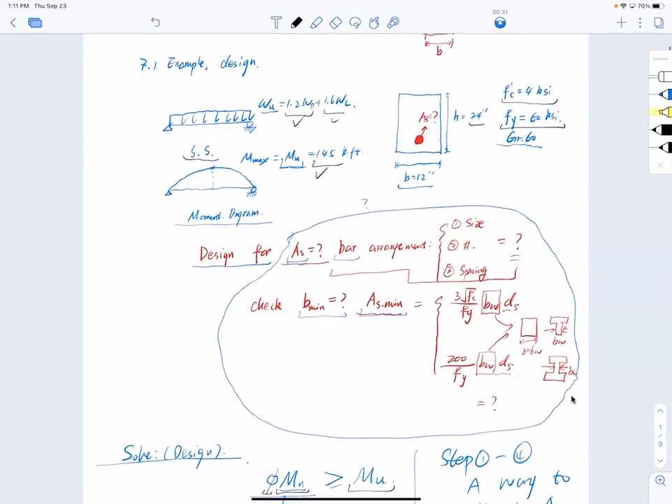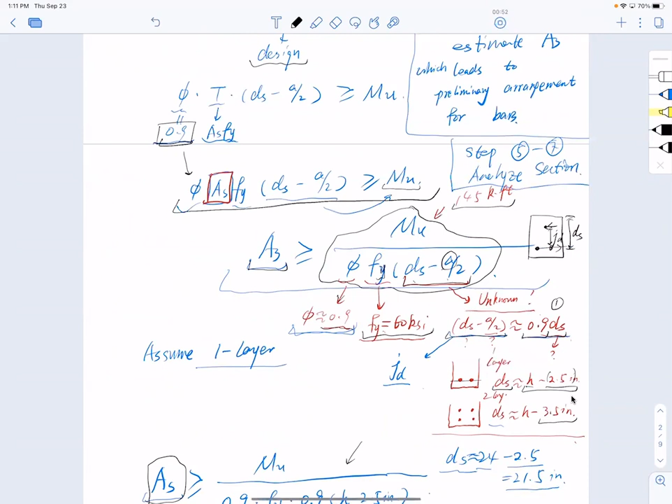So what did we do? We start from the design philosophy, phi Mn has to be greater than Mu. Then we guess and estimate phi, which is 0.9. Then we use As greater than or equal to the number from the design equation. And don't forget, we estimate ds minus half a as approximately 0.9 ds, 90% of the depth.

For one layer reinforcement, ds equals h minus 2.5. For two layers, ds equals h minus 3.5. For any design problem, for example exam number 1, you start from one layer unless I specify in the problem that 2 layers or multi-layer reinforcement might be needed. Usually it's 1 layer.

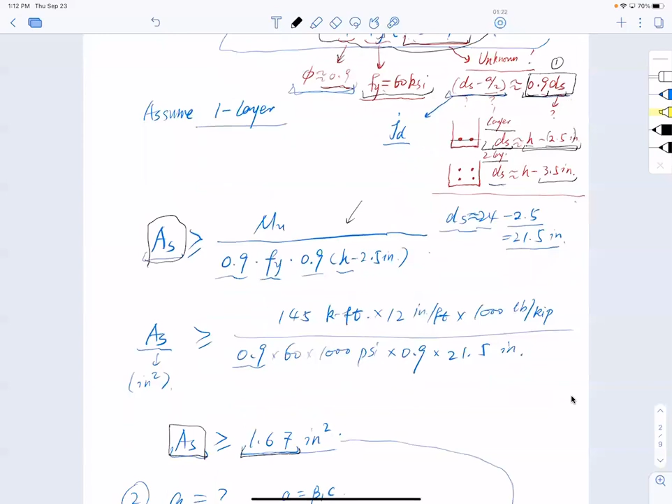Then from there, you calculate your first estimation of As. You get As area equal to 1.67 square inches, and then we proceed to recompute the effective compressive zone A. So how do we calculate effective compressive zone A? We use the same equation: compression has to equal tension.

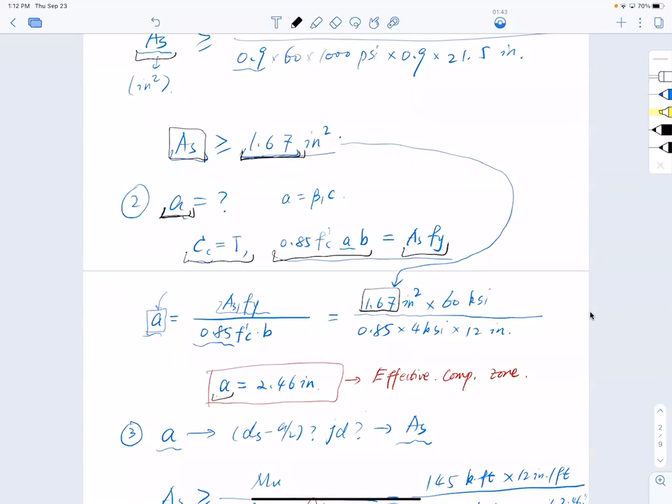0.85 f'c A b equals As fy. Then I get the effective compressive zone A right here. Once you have the effective compressive zone A, you use that A to recompute your lever arm, that is jd, or ds minus half a.

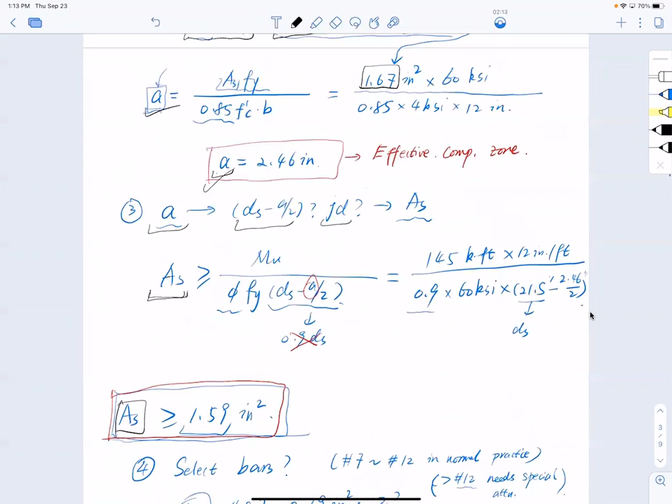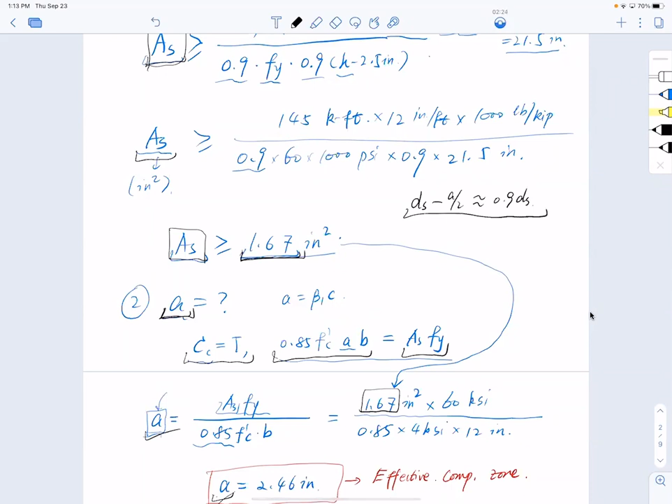So pay attention folks, we're doing As twice, essentially. We did As without knowing anything, we made a guess, most importantly here: ds minus half a approximately equal to 0.9 ds, this is approximate. We bring this value in, calculate the new A, and recalculate the As.

That's what we did, and once we have As from the second calculation, we can start selecting bars. So how do we select the bars? We pick one row for now, say number 8 bar, and do 2 number 8 bars—that's not enough. Then we go to a bigger bar, number 9.

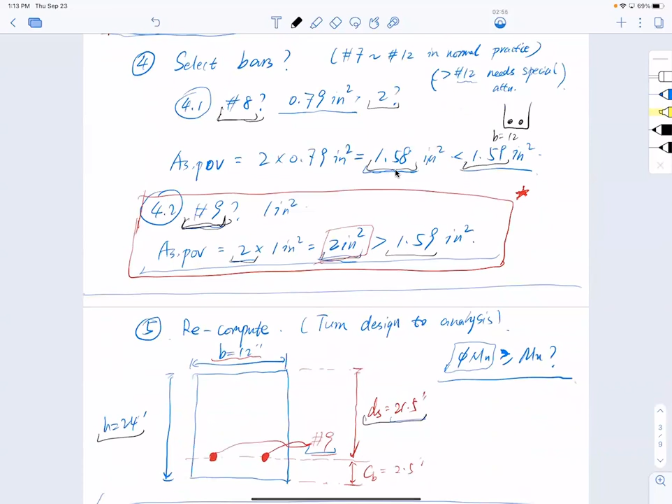We say okay, 2 number 9 is probably going to be enough—we overkill, 2 is bigger than 1.59. Then we bring this 2 number 9 bars in and recompute the section capacity, turning this design problem into an analysis problem.

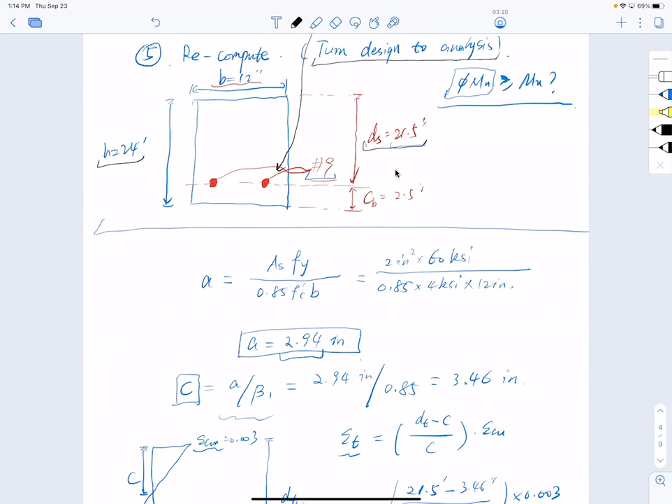Okay, so this is very important. All the steps 1 to 4 basically give us an estimation of reinforcement. Given the estimation, select the bars, then we turn the design into an analysis problem and recompute A again, doing the whole shebang like we did before.

And then the final thing to watch out for is the strain in the steel. You have to make sure that the strain is bigger than 0.005, which is tension controlled. Why is that so important? Because we made the assumption at the very beginning that phi equals 0.9.

I had a question from a student yesterday saying, what if at this point I realize my epsilon t is not tension controlled? It might be something else. My answer is, if epsilon t is not tension controlled, that is fine. Just use that strain value, recompute your phi, and recompute your moment. The only thing you need to worry about is that if epsilon t is greater than 0.005, tension control is fine. But if epsilon t is between 0.005 and 0.00207, all you have to do is change phi, okay?

You do not have to worry about Mn calculation, because Mn equals As Fy times d minus half a, and if your steel strain is between these two values, you still have the yield strength in the bar. The problem only arrives when your epsilon t is smaller than 0.00207.

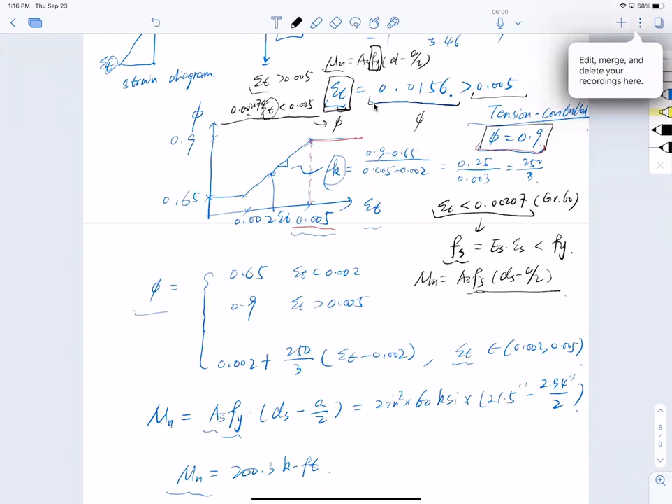Okay, can you guys hear me? Can you guys hear me? Yeah, I can hear you, did I cut out? Was I cut out? Okay, sorry, where did I cut out? Let me repeat, let me get this thing closed. Okay, I don't know what's going on with this app thing. Okay, you guys hear me okay? Yep, all right, good deal. Just froze a little bit, right? Go back about 2 minutes. Okay, I think I was talking about epsilon t, was I?

When epsilon t is greater than 0.005, it's got to be tension controlled. Was it? Help me out here, Jordan. Was I... yeah, that's there where it started getting fuzzy. Okay, sounds good, yeah, Sophie. Okay, Jordan, all right, let me do that. So let me clear it up and re-say this. This is important, okay? I don't want you guys to mess up on exam number 1. Let me clear this up.

No worries, we have time today. Okay, so get this whole thing to come out. Good, all right, so let's take a look at it, right?

Once I have my epsilon t calculated out to be larger than 0.005, I'm okay. Why is that? Because it's tension controlled and phi equals 0.9, which works out perfectly because I assumed 0.9 to begin with. The problem only arrives when epsilon t is now smaller than 0.005.

Then I have two scenarios. Scenario 1, epsilon t is between 0.00207 and 0.005. This means you can still use Fs equal to Fy, meaning you can still use the old moment equation, Fy times ds minus half a. You still can do that, because the reinforcement yielded at least.

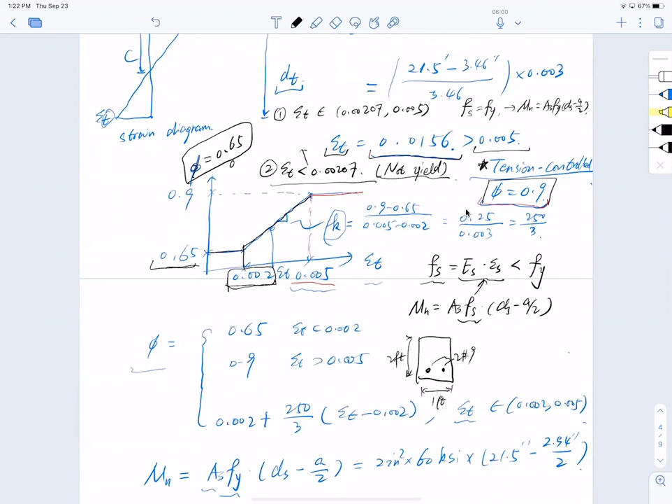Quiet, silent. So in terms of the graph, when you look at it, when you have 0.9, you're under tension control, right? When you have 0.65, you're under compression control, and in the middle, it's transition zone. That's correct, right? What does that mean?

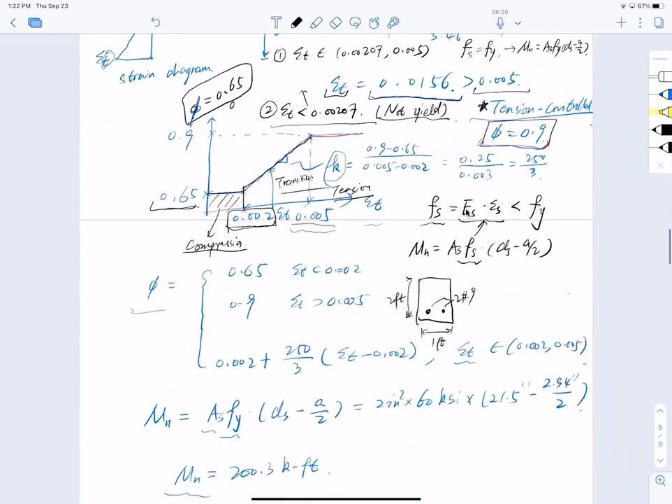Real life example. So the physical meaning of these three words really comes from the failure state. Let me rewrite it here before I move forward. Let me find the best spot here. Maybe this is the best. Again guys, I write it here, doesn't mean it's really connected. This is more like an independent excerpt here. So if you really think of it, when I say tension controlled, that means at failure, my strain in the steel is always big and approaching a failure strain. And then concrete fails there. This is tension control, meaning that the tension of the reinforcement governs the failure mode.

Now, the word compression control means that at failure, my concrete has busted at 0.003, but my steel does not, or has not even yielded yet. So it is a concrete compressive failure that governs the failure of the beam.

Nick, I have to mute you, okay? In case you have any question, you can raise up. And then if it's in between, we call it transition, because both the compression of the concrete and tension of the steel determine the failure state. Is that clear? Yes, thank you. Sure, no problem.

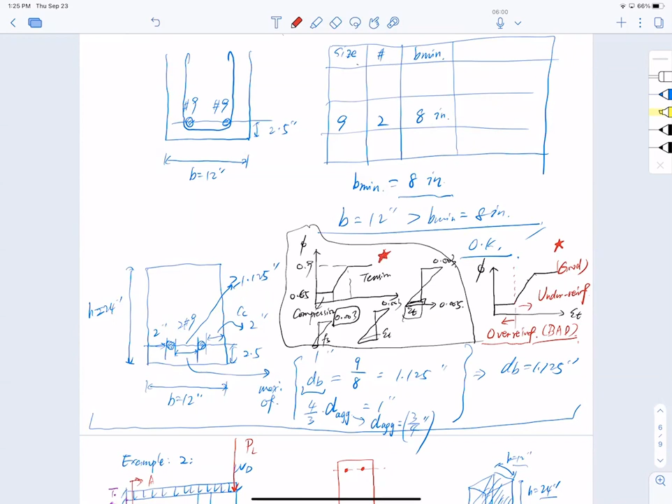So naturally, under reinforced state covers tension control and transition zone. This is just knowledge for you, and you need to know it when people talk about it. But this is something we're most likely not going to test you on. We'll test you mainly on tension control, transition zone, or compression control.

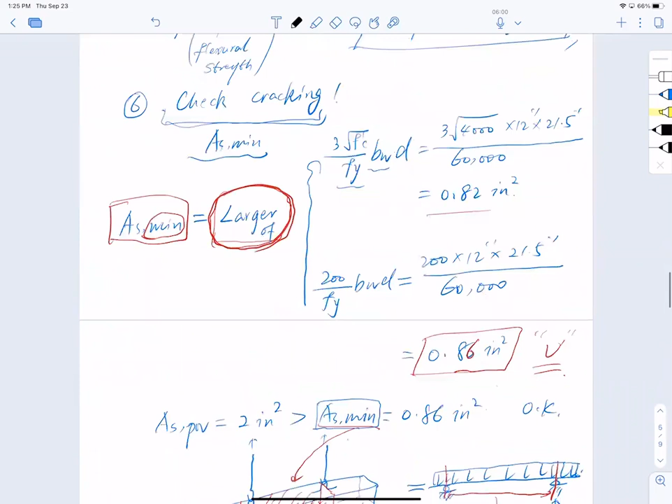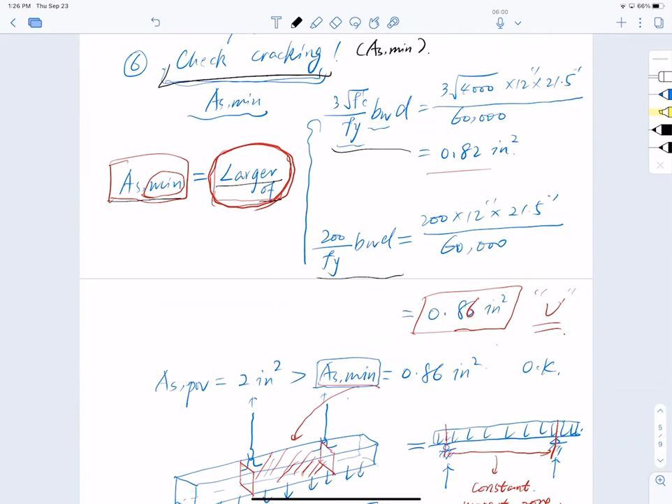I have to run faster a little bit to finish this example. So we finished example number 1, and don't forget at the end of it, we check two things. One is that we check cracking, which you can think of simply as the amount of minimum reinforcement needed for the beam to resist cracking, so when you lift the beam up, it won't fall on you. This equation here is AS min equal to the larger of these two equations, not the smaller of, and you find the larger value and this governs.

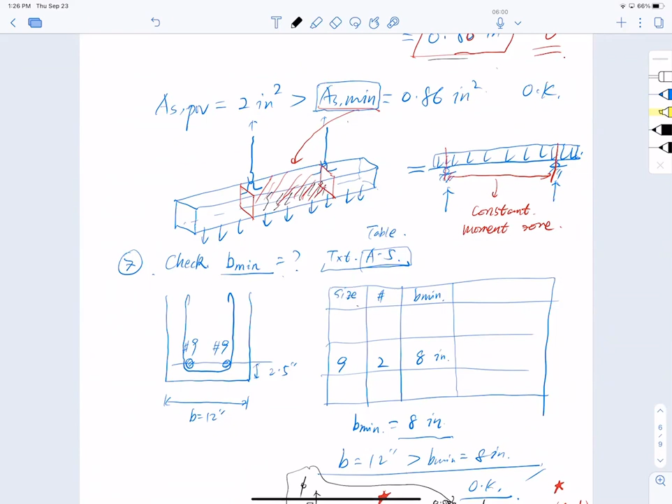And I even showed you how the crack's going to happen. It's probably going to happen between the lifting points, so that's where you need to be careful about. Then the last but not least is to check detailing. In our case, we're mainly concerned about the minimum beam width. And how do we do that?

Two ways. One is go with table A5, that is on Canvas in your file folder. You have sizes, you have numbers, you can estimate the minimum beam width. But I strongly urge you to use the calculation we showed from the previous lecture, where you actually calculate the beam minimum. You will need that for your first exam, which I will show some problem examples tonight.

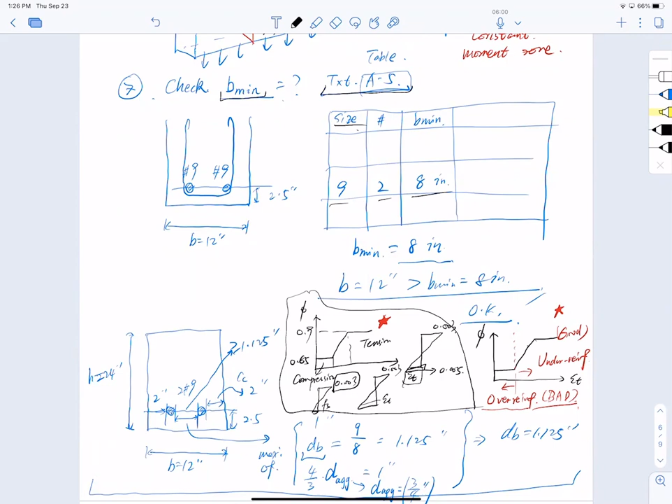Okay, so that is done, not too bad, and we got everything situated. We're happy, and we'll move on to another example of a cantilever beam. First thing first, when you have a cantilever beam, the reinforcement has to sit differently.

Now, my first victim, Audrey, Mr. Powell. Audrey, you there? Hey, how are you doing? I'm okay. Good, good. Quick question.

Don't be nervous, okay? So if I have a cantilever beam, does my reinforcement have to be on top or on the bottom? If I have a cantilever beam, right, it's bending this way, so which side is my tension side? It's at the bottom. The bottom will be in compression, unfortunately, right? So which side will be my tension side? The top, right? Because I have tension, I have compression, and finish the coupling moment.

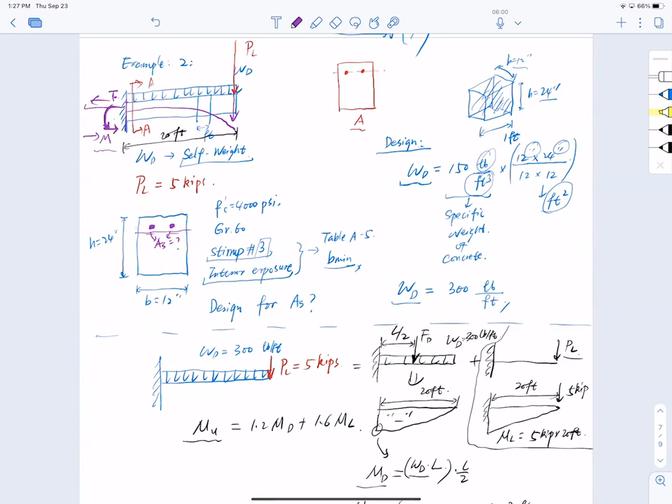So if my tension side is on the top, will my bars be on top or bottom? The top, right? So that's right. Don't forget, in the exam, thank you, Audrey, we'll ask you where the bar is going to be at. So in the exam, I can tell you right now, I just made a problem this morning.

So in the exam, I ask you to draw the geometry of the beams. For case A, you have a cantilever beam, and this is where the reinforcement is at, so you draw it on the top. And case B, for example, I'm just making things up again, and I have a bending moment right here, sorry, this has got to be positive. Positive bending moment like that, and I ask you where the reinforcement is at, you draw it on the bottom. So it really depends on the positive or negative sign of the bending moment, which determines where the reinforcement is at.

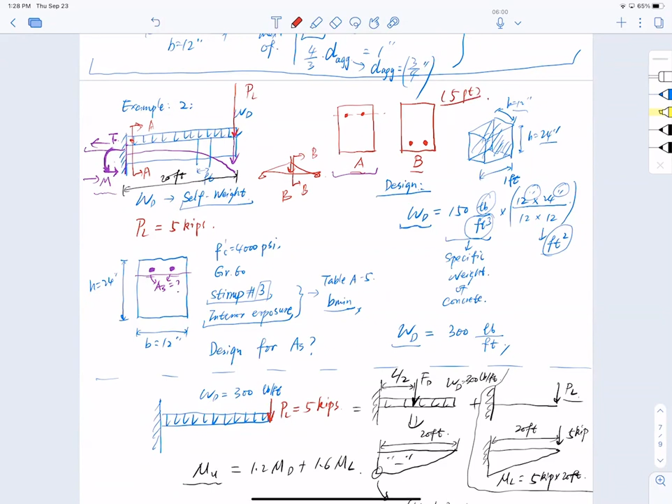Okay, so this is probably worth 5 points, guys, in the first exam. Pay attention, pay attention. Okay, so that's that, then we're quickly moving on.

We have dead load, we have live load, we demonstrate how we calculate that, and eventually we arrive at a required moment of 232 kip-foot. I believe somebody asked us another way of calculating this. We demonstrate that as well and come up with the same number. We're happy, we're happy. All right, so with that, now let's start about the design process.

So we know the total exerted moment has to be 232 kip-foot. So to come up with a design that satisfies that requirement, phi Mn has to be greater than or equal to Mu, that is 232 kip-foot. Okay, so I don't know anything, but I want to use my first equation, step number 1.

Step number 1 is to find AS, estimate AS. How to estimate AS? AS should be greater than or equal to Mu divided by phi Mn, right? But spell out Mn, that is phi fy multiplied by ds minus half a, ds minus half a.

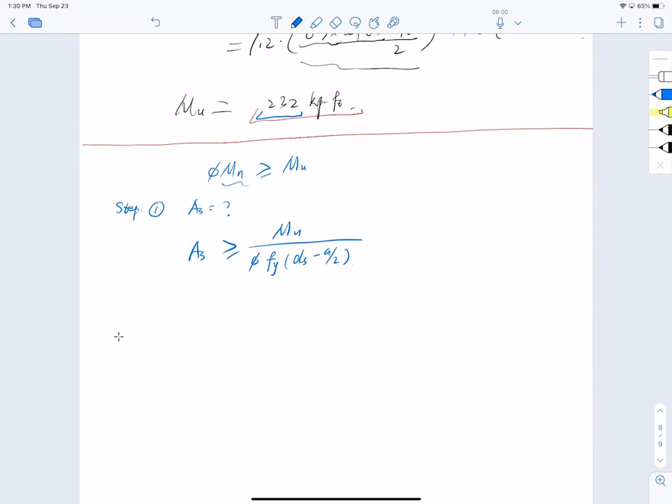Andrew, Mr. Slinkard, are you there? Andrew, are you there? Yeah. All righty. How are you doing, sir? I'm doing okay. Oh, that's good, good to hear.

So quick question here, Andrew. So if I have a ds minus half a, I don't know that. What should I put here?

If I don't know ds minus half a, what should I put here? You estimate it with 0.9 times ds. Exactly, thank you Andrew. So that is what we're going to put here, 0.9 ds, right?

So with that number, I can carry out my calculation. AS has to be greater than or equal to mu, which is 232 kip-feet, multiplied by 12 inch per foot, to convert everything back to inches. Why? Because I want AS to be inch squared. Divided by phi, approximately 0.9, multiplied by yield strength of 60 KSI. I keep the KSI unit because of the kips on top. Then multiply 0.9, which is this 0.9 here, times ds.

What is my ds? I don't know ds, isn't it? But in my head, I now have a picture that my reinforcement is going to be on top. I don't know anything, but I know the section height is 24 inches. So I'm just going to take a bold guess that concrete cover got to be 2.5 inch, since I have only one layer to be estimated. So my depth got to be h minus 2.5, and that is 21.5 inches.

So from that calculation, I can move on to get my AS. Now AS equals 2.66 inch squared. Guys, do you get the same number? Ben, Mr. Schaefer, are you there? Yep, I got that as well. You got that too? Okay, great. Thank you so much. Now we have finally arrived at a reinforcement area of 2.66 inch.

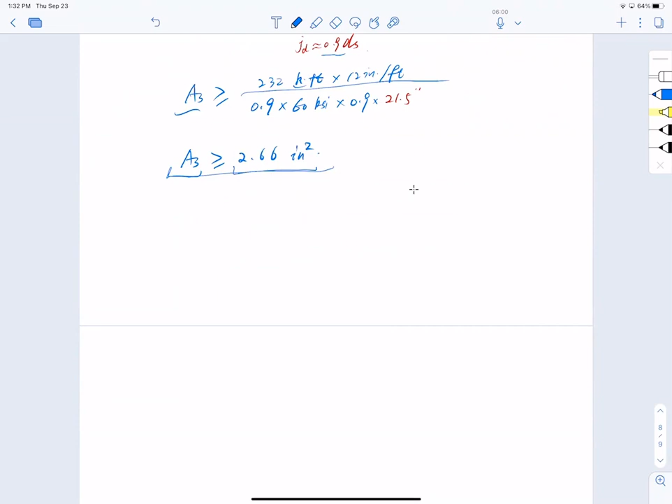Now what we're going to do is follow the next step. The next step is to re-estimate our a, and then re-estimate our AS. Not yet here. After we get our AS, we need to confirm my strain in the rebar to make sure it's yielded, then get my phi, then select the bars. After that, select the bars and get my epsilon t, get my phi, then get my mn, then confirm that phi mn is greater than or equal to mu.

Now this part, folks, I'm going to leave it to you, because you already have an example from the previous problem. This is going to be your quiz number 6: find, actually design for, select bars, check phi mn. And I forgot also, you need to make sure AS min is satisfied, and also the beam width, minimum width, has to be satisfied. This, folks, is going to be your quiz number 6.

Alright, this is what we talked about, designing a reinforcement for known section dimensions. Any questions so far? Any questions? Guys, anything? Are we okay? Any wondering, any challenging questions? Anything? Dr. Mo, okay alrighty. Well, I assume we're fine for now, and I know you have questions later, but we can talk about that.

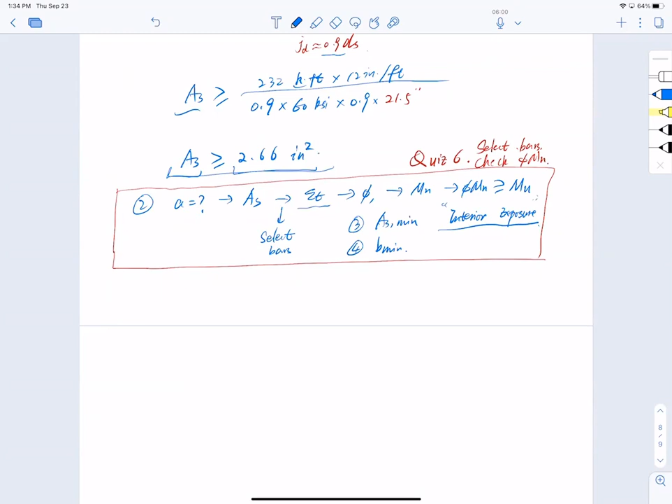Now we have gone through like 1.5 examples of how to design a singly reinforced beam. But you keep forgetting where you're doing this. Sometimes we need a flow chart to help us understand how we do this. So let me introduce a flow chart, flow of design for singly reinforced section with known section size or section dimensions, right?

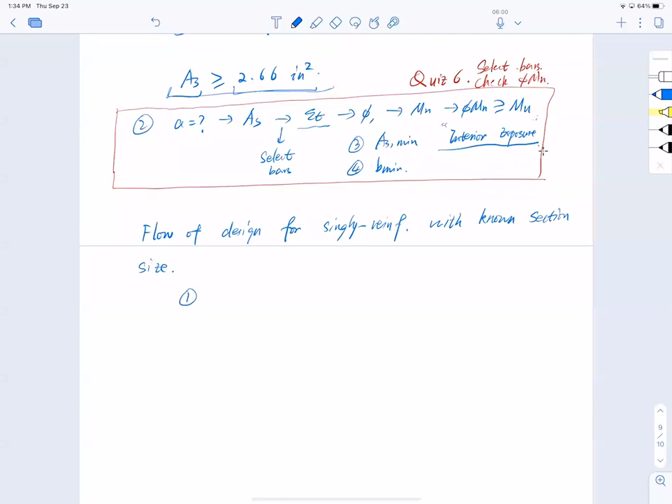So what is the step? First step is to assume yielding, actually assume yielded. Why is this so important? Because I can use T equal to AS times fy, and that's how I got the equation to estimate the reinforcement to begin with. Now with that, I can get my AS.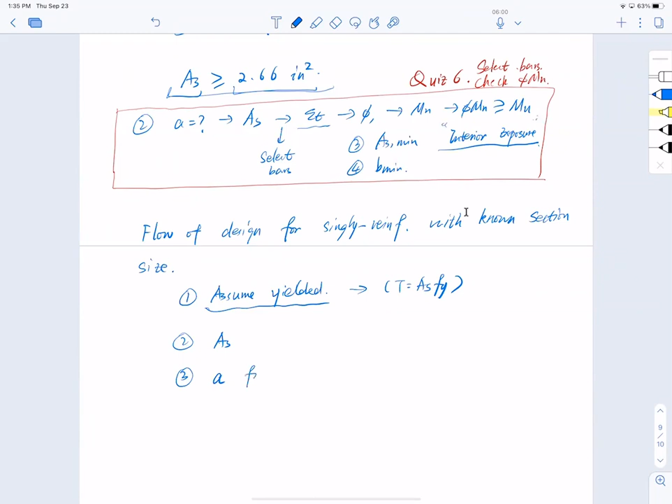Estimate my AS. And once I estimate AS, what do I do? I can get my tension equal to compression, right? So I can get my a from tension equal to compression. I put CC here because all the compression comes from the concrete anyway.

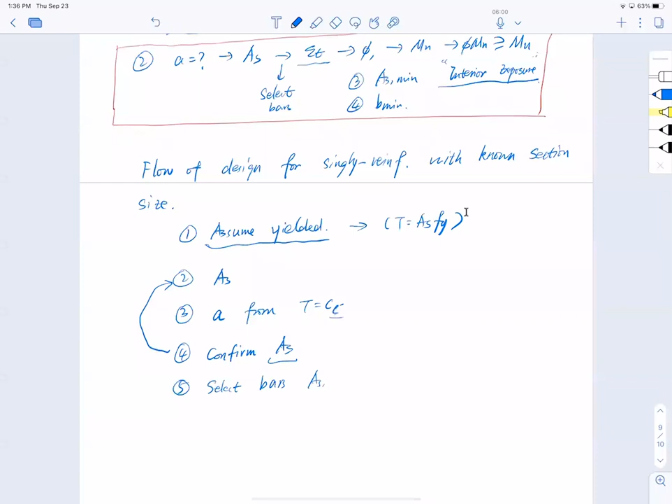Then after I get my a, what do I do? Confirm AS, basically repeat step 2 again to find your AS. Then afterwards select bars that have AS provided greater than or equal to the AS computed. Select bars given that is satisfied. Then with the selected bars, you turn design into analysis.

What's more important in this design analysis is to find the actual compression zone C, and that is equal to the effective compression zone a divided by beta 1.

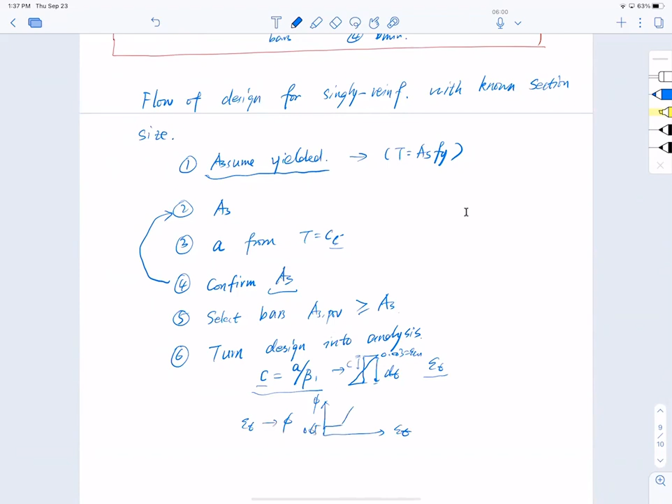Why do we need C? Because we can use our triangle, 0.003 equal to epsilon Cu here, and dt here, to find the strain in the last layer of bars, which in this case is one layer, epsilon t. Then from epsilon t you get phi using that famous diagram I keep repeating: 0.65, straight line, 0.9, 0.005, and 0.002.

So now I got phi, and then last but not least, you get phi mn, make sure that is greater than or equal to mu, but don't forget to check your cracking, which means check As min and check the minimum beam width.

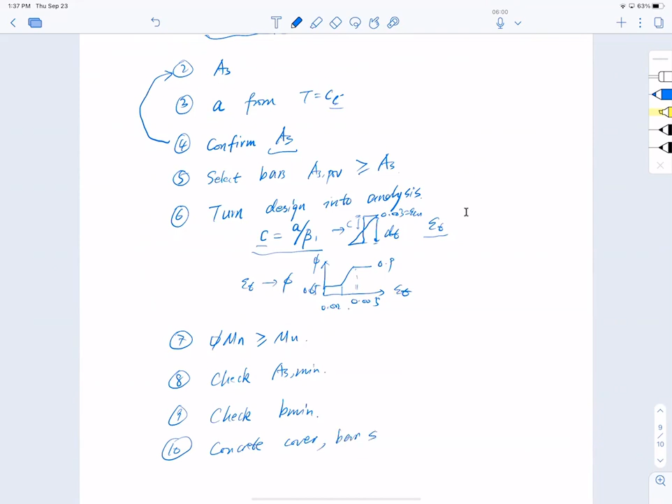And then check concrete cover and bar spacing. You need to fix those numbers, right? And then you're done. That is the flow process of designing a beam.

Now this is designing a beam with known dimension. This is probably something you can use for a cheat sheet, and all those equations we just wrote down, you can jam them here, here, and here as well, all those equations. You can use that for your cheat sheet.

Alrighty, any questions folks? Are we okay here for design of a singly reinforced beam with known section size? Are we okay? All right, silent again. Well, let's see—you might have more problems when I give you the practice problem.

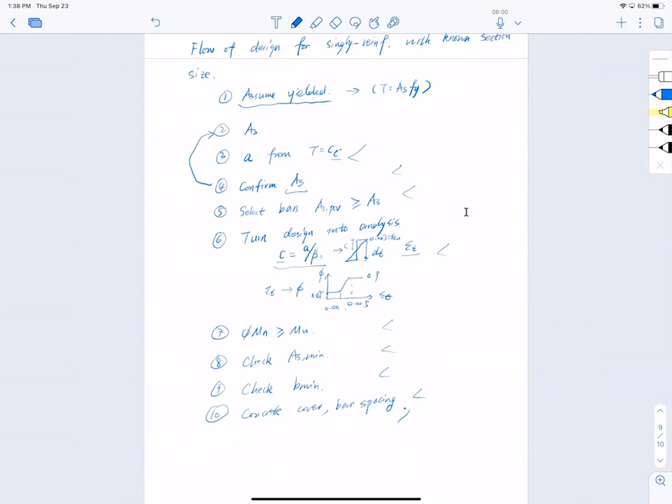So here, let me open up a new lecture today. Today, the main dish is to talk about lecture number 8, design with unknown section size.

Today we'll talk about term A: design for singly reinforced section. We're still in the singly domain, singly reinforced section without section size. Very important—without the section size. And this, ladies and gentlemen, is actually a very challenging problem.

Now before we do anything, let's see what we need to learn today, right? Two objectives. Objective 1: we need to understand there are so many new terminologies today we're going to introduce. The first thing is to understand the definition of reinforcement ratio.

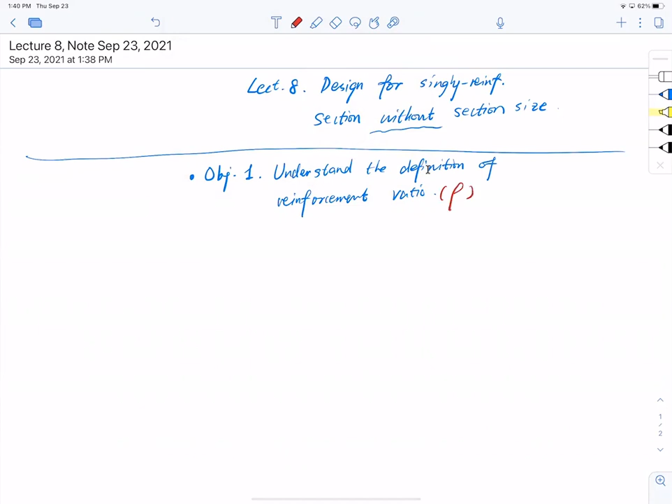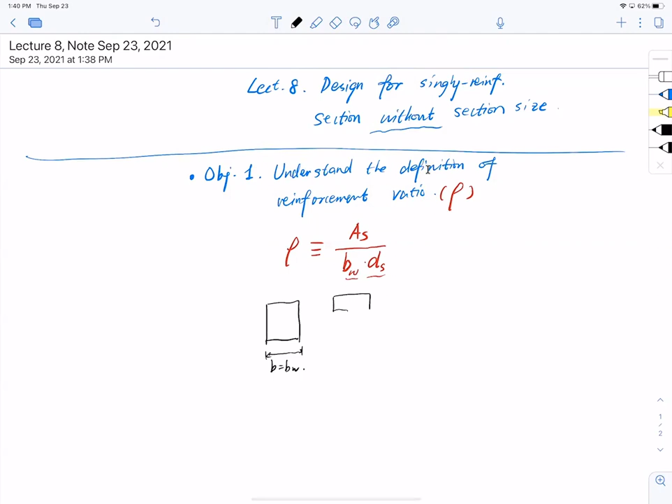What is BW? What is DS? If you have a section like this, this is B, and at the same time it is BW. If I have a section like this, say a T-beam, I have BF meaning the flange width, and I have web width BW—in this case, this is BW. For an I-beam, same thing, this is BW. Now DS means the depth of the section, the center of the group of the bars—group of the bar, not DT, but DS.

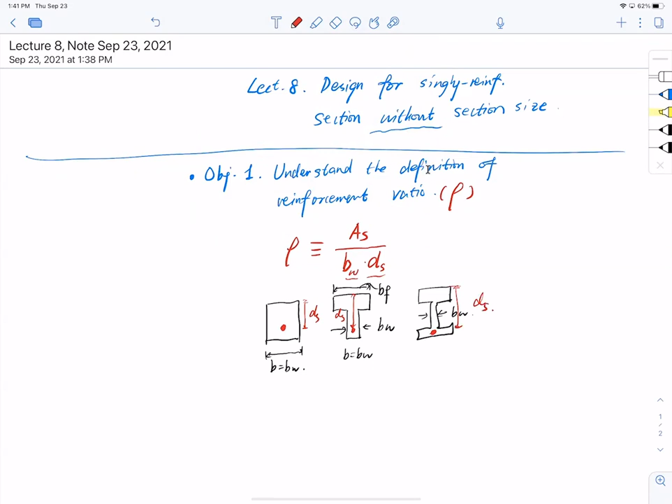So that is the definition of reinforcement ratio. Now that's the first thing we need to understand. Objective 1 completed. Objective 2: we need to learn to design—design singly reinforced section without section sizes.

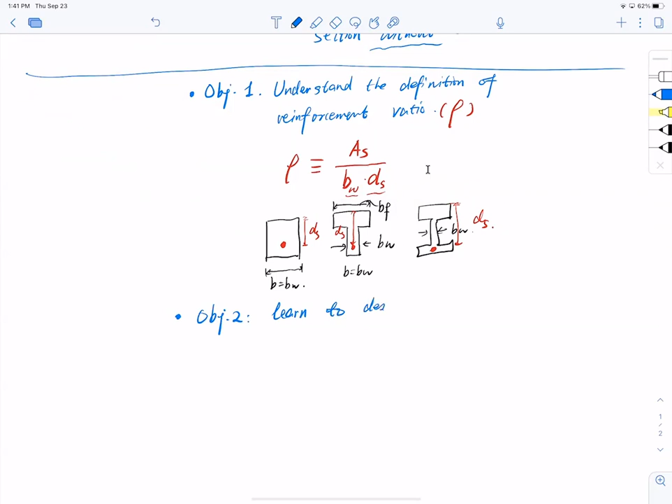So you know it, right? So how are we going to design? Now going back to old topic, you remember we've gone through under reinforced, over reinforced, tension control, compression control, transition zone, right? So I'm going to pick my next victim here.

Who's on my list? Brennan, Mr. Poole, you had the microphone issue last time. Are you there? Still having a mic problem? Brennan, not responding? Or am I disconnected? Folks, can you guys hear me? He said he doesn't in the chat. Okay, let me see that. Still yes, all right, I'll still have to skip you. You're losing a lot of extra credit opportunities, Brendan, I'm just saying. Carson, are you there?

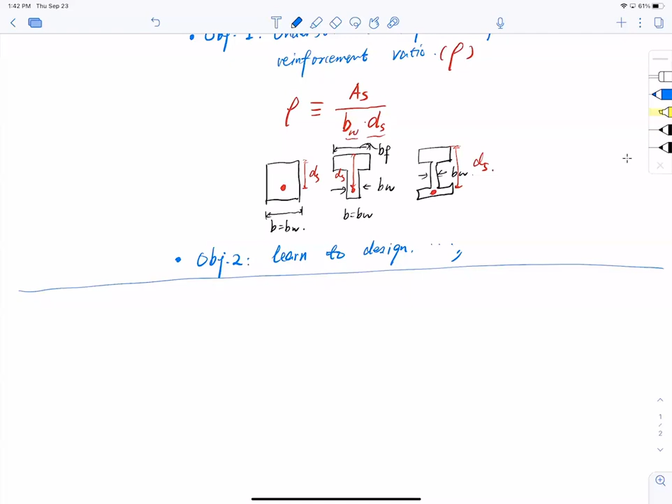Yeah, I'm here. Okay, quick question for you, Carson. How are you doing, by the way? Good. How are you? Good, good.

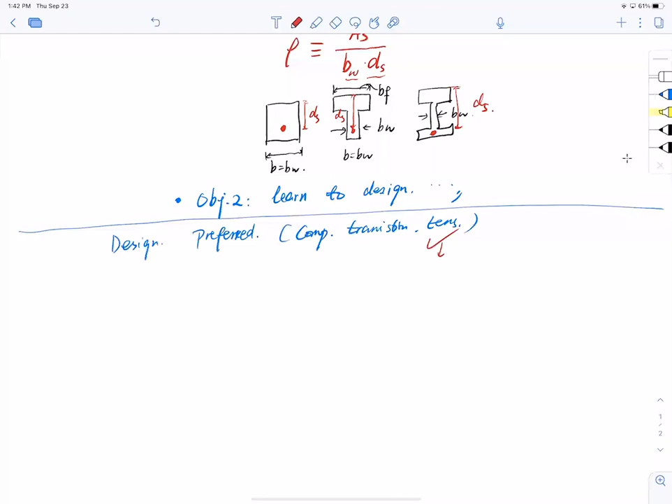So when I design my beam and want to give you options for a preferred state, I have compression controlled, transition, and tension controlled. Tension controlled, right? Why is that though? Why do I want tension controlled? Because more of the failure in the beam will be on the reinforcement, and that gives you more ductility too.

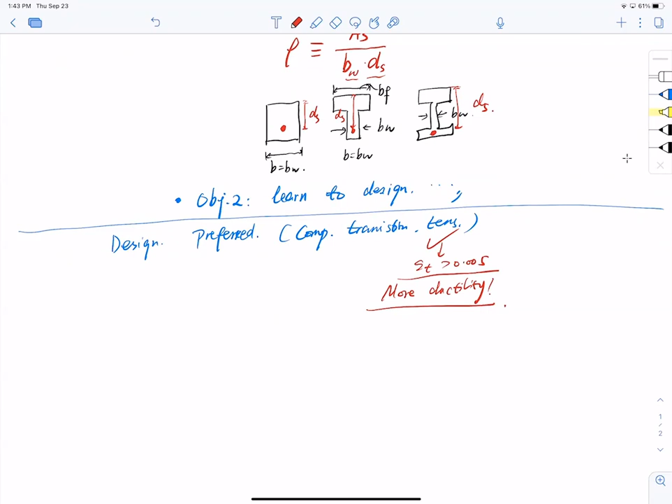Thank you so much. So that is the reason we want more ductility. You were seeing that in the lecture before, I said you compensate that by the strength reduction factor. The lower ductility you have, the lower strength reduction factor you have. So to compensate that, but that does not mean we want low ductility. It's just some compromise we have to make. So now we all know that we want a ductile beam, high ductility. So how do we make sure we have that?

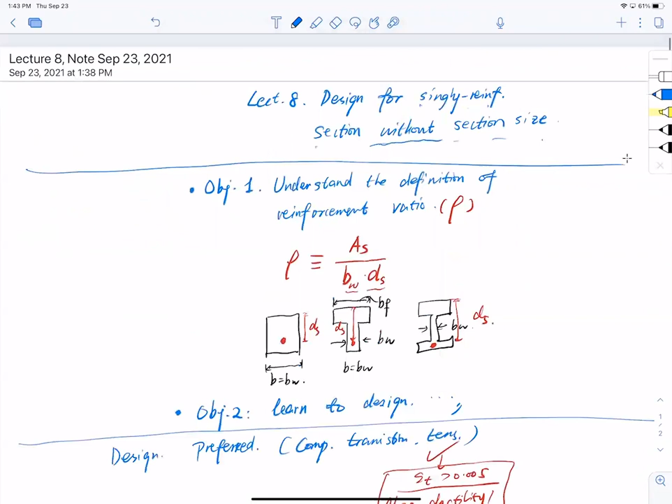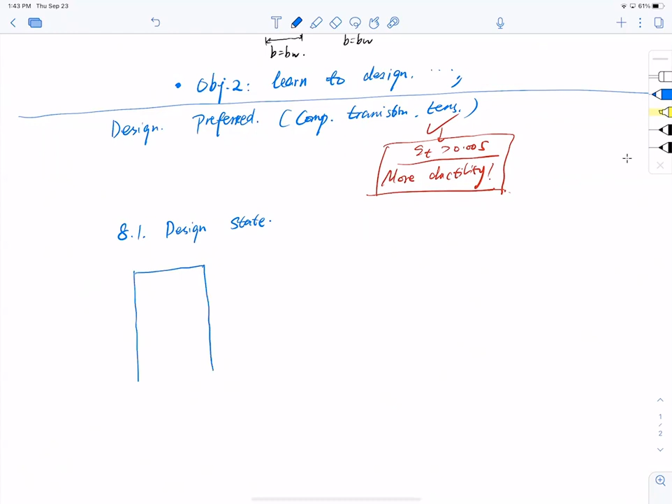Is it 8? Yes, so 8.1. Let's talk about design state. So a section looks like this - you've seen this so many times before. Have a width, have a height, and also have a depth. And I'm going to put 2 symbolic bars representing the reinforcement, and then put some strain diagram showing what the strain diagram looks like.

And this is what it is, a triangle. The failure strain for concrete is 0.003, and the actual compressive zone size is C, and the reinforcement here, and the strain in the reinforcement for one layer, I can call them the same, epsilon S equal to epsilon T, isn't it? So this is a strain diagram, and you know that to get 20% of free credits, you need to draw the corresponding stress diagram as well.

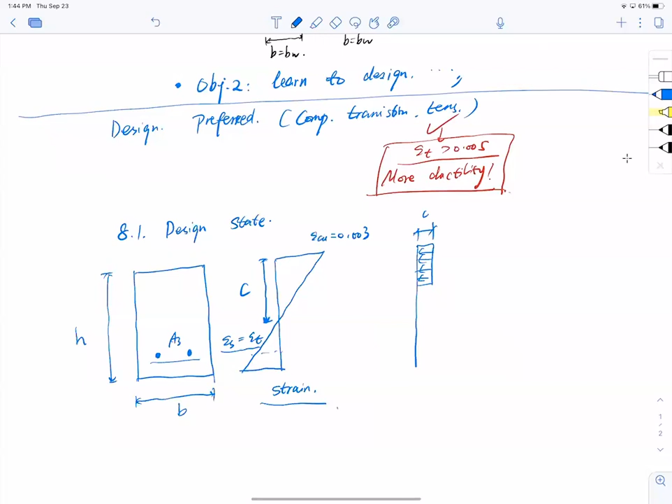So the stress diagram reads like this, and this top here is 0.85 f prime c, and the effective compressive zone is beta 1 C. Then the stress in the rebar is going to be Fy tension, like so, and internal forces: Cc concrete equal to 0.85 F prime C A B, and has a distance of half A away from the top fiber. Then last but not least, the tension here, T equal to As Fy. Mind you that the distance between the compression and tension has to equal ds minus half A.

So this is a 5-pointer. Well, I have another 5-pointer, and I have another 5-pointer, and this is called internal forces. When you collect them 3, I give you another extra 5-pointer to make it 20%, right? So that's not too bad.

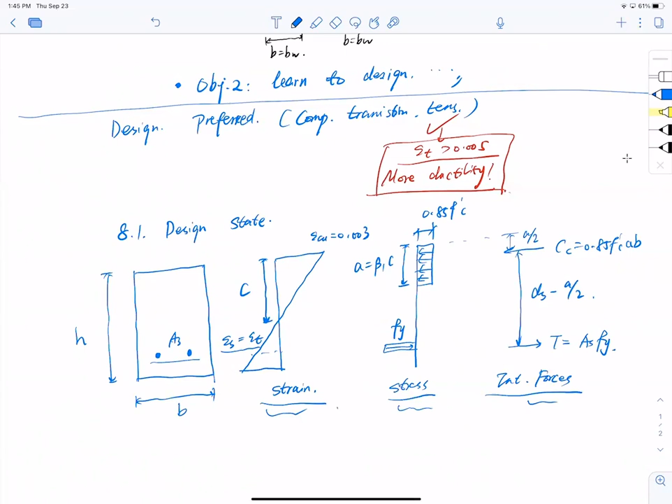Now, when I have a design state, if I want to start the beam with a tension control limit, I can enforce my strain in the steel to be a higher number, and that number has to be something greater than 0.005 to be tension controlled. If I can make sure my tensile reinforcement hits this number, then I surely have a tension control state in my beam, isn't it? So I call this a choice, or we call it design state.

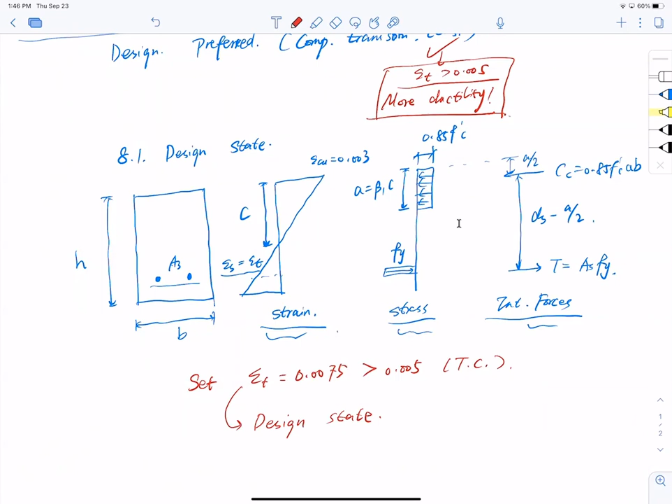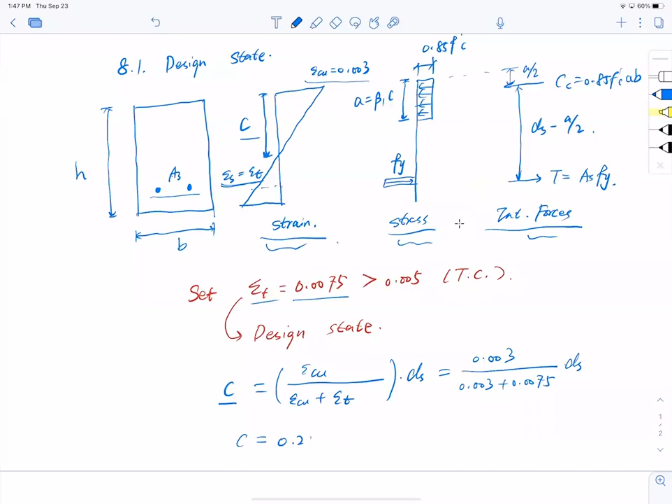Now this magic number ACI picked out for us already. ACI says you better use 0.0075 - I missed the 0 here, folks - 0.0075, which is a larger number than 0.005, to make sure that is tension controlled. So much to ensure that if I use this number, I can actually calculate my actual compressive zone size C, using the triangle here, that equals epsilon Cu divided by epsilon Cu plus epsilon T, which is the strain here. I set it to be 0.0075 multiplied by ds. Bring the numbers in: this is 0.003 on the top, bottom here 0.003 plus 0.0075, isn't it? And that, ladies and gentlemen, gives me an actual compressive zone equal to 0.286 ds. So that is my actual compressive zone.

So with the compressive zone, in order to get my total compression force, I can write Cc equal to 0.85 F prime C, beta 1 Cb, beta 1 Cb. And of course that is equal to 0.85 multiplied by 0.286, so I got 0.24 beta 1 F prime Cb.

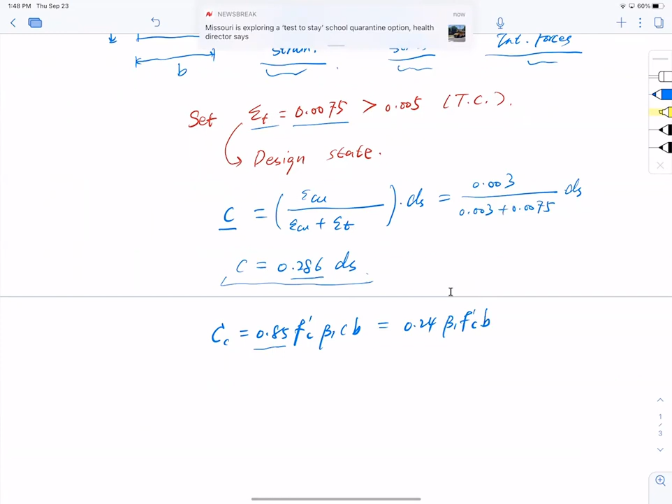Don't forget, this is in terms of ds. So bring this number into this equation. This is what I got. I got this compression from the concrete. Naturally, I want to balance that with tension, so tension equals AsFy, and that equals Cc.

So I got a 0.24. Just bring this here: beta 1, f prime c, b, ds. All right, so if you look at this equation, you probably get lost a little bit.

So Bob, what are you doing? What I'm doing is I look at this equation, I see AsFy on the left-hand side. I also see 0.24 — weird number, by the way — beta 1, f prime c, b, ds.

Now I start to look at these two terms and think about manipulation. I like math, I just want to play around. So what I do is put this As here, keep this As here, and move this bds here.

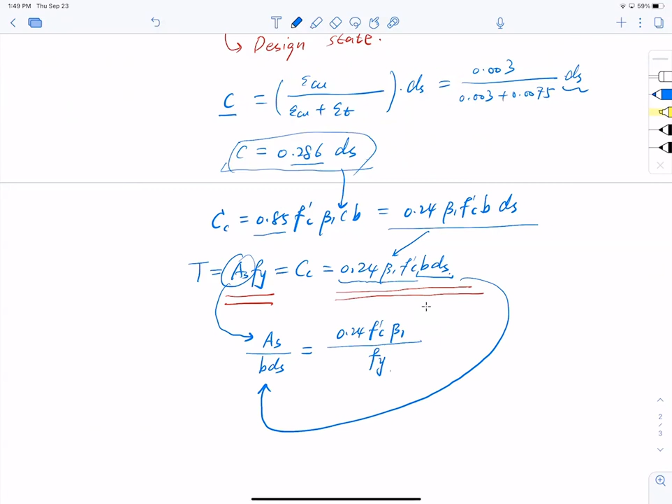Beta 1, don't forget, divided by Fy. Then I still have this equation, isn't it? And then I start to look at this: As divided by bds.

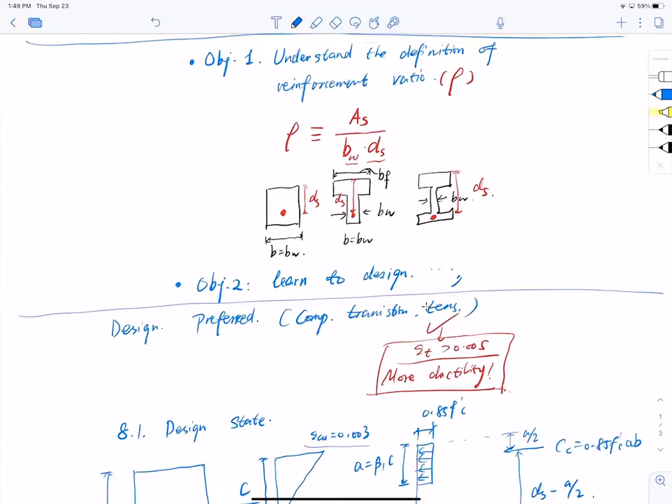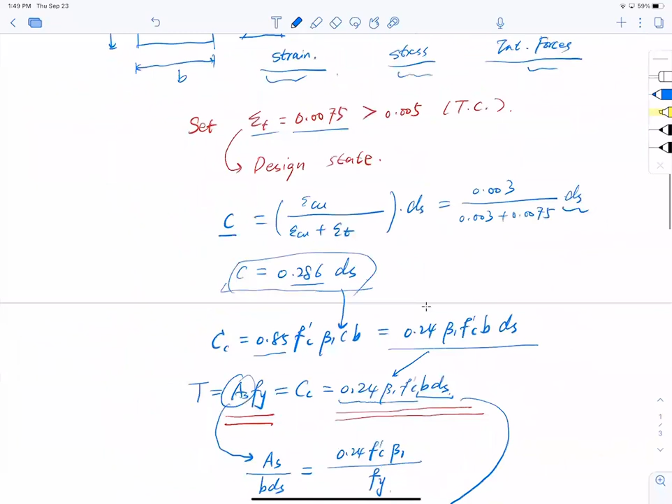Remember what we said at the beginning of the lecture, we introduced a term, the rho reinforcement ratio, defined in three lines as As divided by bds. So, I got this equal to the reinforcement ratio rho here.

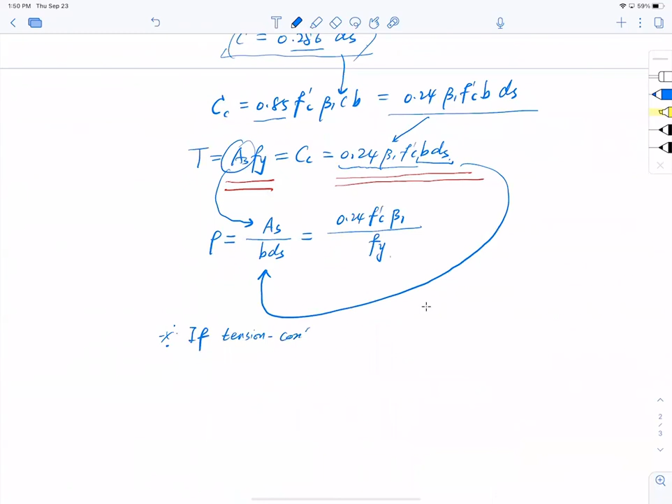I got it. Why are you so excited? Because now I know that if I want tension controlled design state to be maintained, or achieved — achieved is a better word — I need to have rho equal to 0.24 f prime c beta 1 divided by fy.

And I'm very happy because this equation is universal. What do I mean by universal? It has nothing to do with section sizes. So this is a very good design rule here.

But I keep looking at it. This 0.24 number is a very strange number. I don't want these decimal points or digits — it's just too hard to remember. I cannot remember complexity like that.

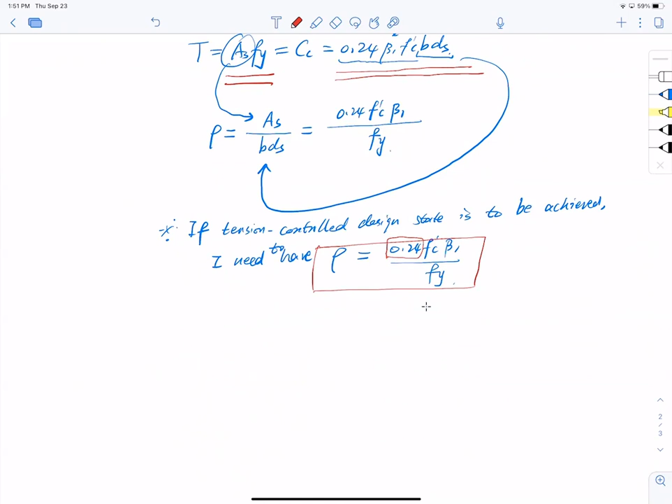So what I'm going to do is dim it down a little bit, reduce it a little bit. How am I going to do that? I say, look, approximately — 0.24 is kind of like 0.25, isn't it? Give or take, 0.25. And that, ladies and gentlemen, is actually 1/4, a quarter.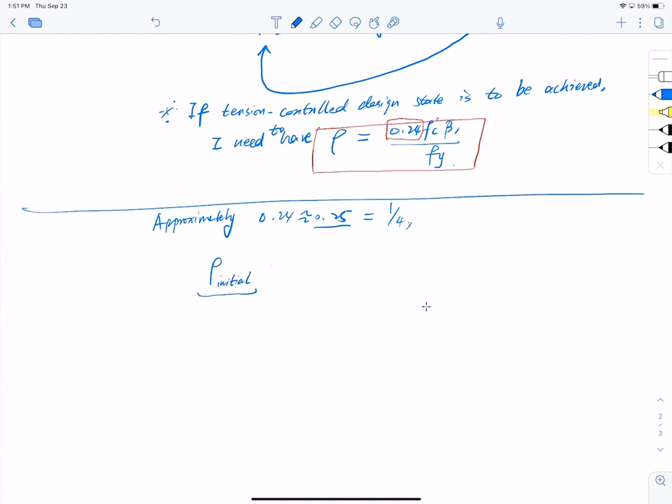So now with that, I can say rho initial — folks pay attention, okay? Rho initial is different from rho. Rho initial can be equal to 1/4 f prime c beta 1, equal to f prime c beta 1 divided by 4fy, or organized a little bit: beta 1/4 multiplied by f prime c over fy.

Okay, pay attention folks here. F prime c divided by fy is a relative strength between concrete and steel, and beta 1/4 is a constant coefficient. I call this the initial design reinforcement ratio. So cool, hey? And this equation is 8.1.

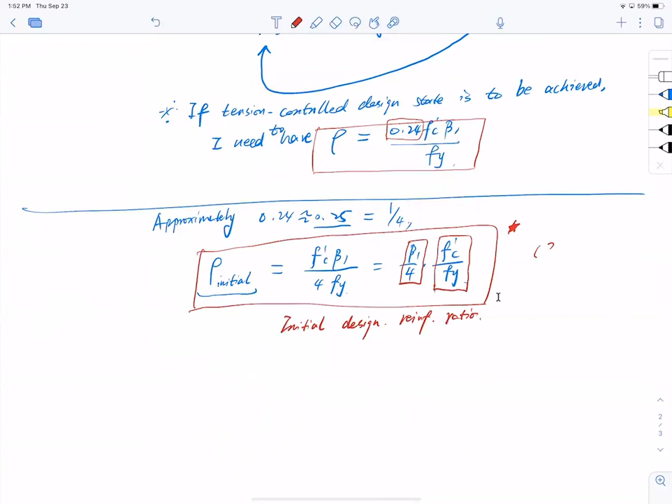Okay, so that means if I bring this in at the beginning of design, I am guaranteed to have a tension controlled state. All right, and if this is not enough...

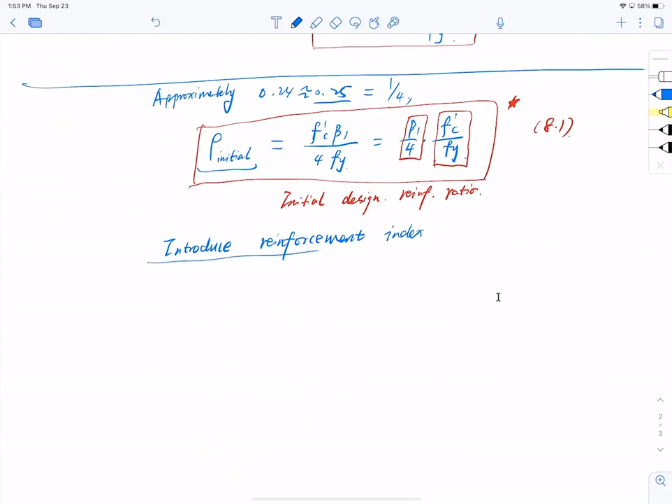ACI said, look, I want to make it more simple, but actually it's more complicated now. We can introduce another thing called the reinforcement index. A lot of definitions today, folks. Reinforcement index — this is called omega, and omega is defined as rho fy divided by f prime c.

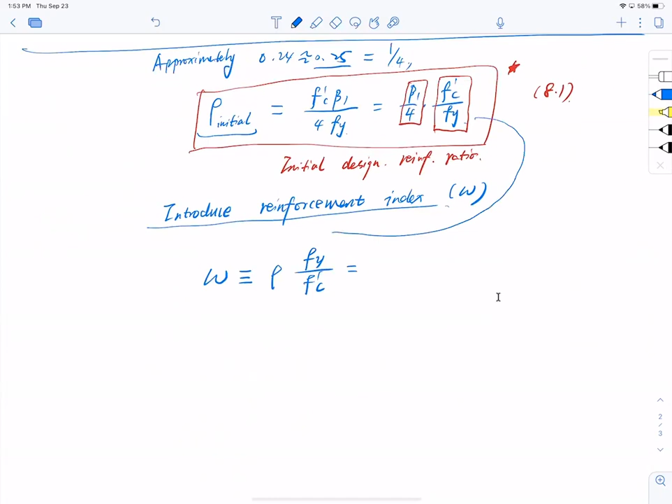You probably figure it out by now — if you put this equation in here, it's just beta 1/4. That should just be 1/4. But nevertheless, this is called the reinforcement index. I'm going to red box this thing so you know it's important. And this is 8.2.

Why do we have to have this reinforcement index? Because remember what we had before: Mn moment equals As Fy times ds minus half a. And then a would equal As Fy divided by 0.85 f prime c b.

Okay, then I'm going to start playing, right? I want to multiply by ds and divide by ds. Why is that? Because when I do that, I can rewrite my equation. Multiplying ds divided by ds is essentially 1, so it's canceled, but I just want to manipulate the equation so you see that a, the effective compression zone size, becomes As divided by bds. I just move symbols around, okay?

Multiply Fy over F prime C, then multiply by D over 0.85. And ladies and gentlemen, here's something interesting: these two terms combine as rho Fy over F prime C, and that is essentially omega, the reinforcement index.

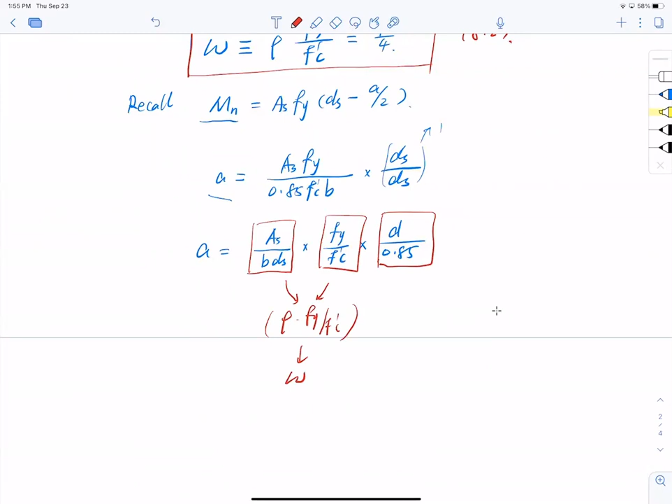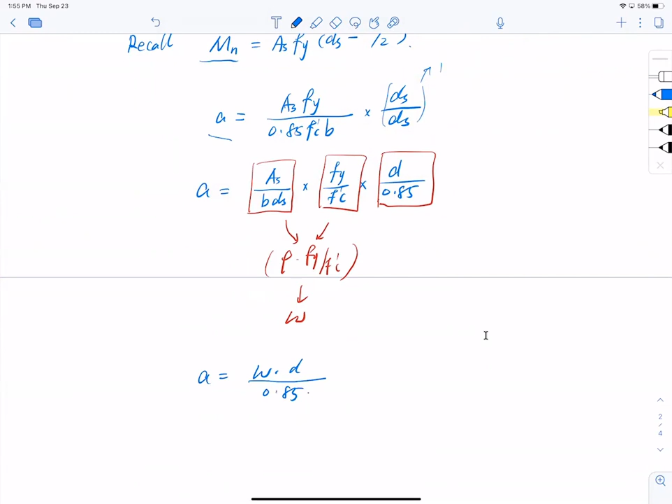So now I can recast my equation. Now A essentially is omega D over 0.85. Let me call this equation... well, not yet.

That is the equation for effective compression zone A. Okay, this is not the end. With this A, I can go back to my moment equation: Mn equals A S Fy, times ds minus half A. And then I can substitute, since I've derived the equation for A.

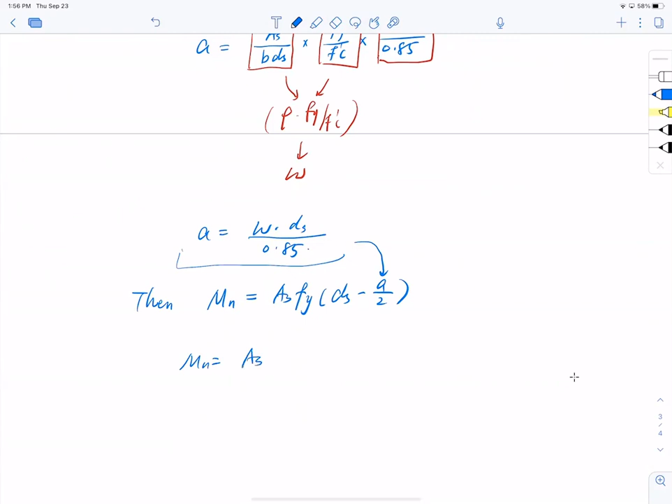Shouldn't it be ds over 0.85? Yes, thank you, it is ds. Okay, thank you very much. So Mn should equal A S Fy times ds minus omega ds divided by 2, multiplied by 0.85.

Now, one more equation, and I promise you'll be done. So Mn equals A S Fy ds, bring this ds out and bring this ds out. Since we share the same ds, this becomes 1 minus 0.59 omega.

Okay, 1 minus 0.59 omega. Let me rewrite this, equal to omega F prime c times 1 minus 0.59 omega, and b ds squared. What is omega? Omega is the reinforcement index, don't forget.

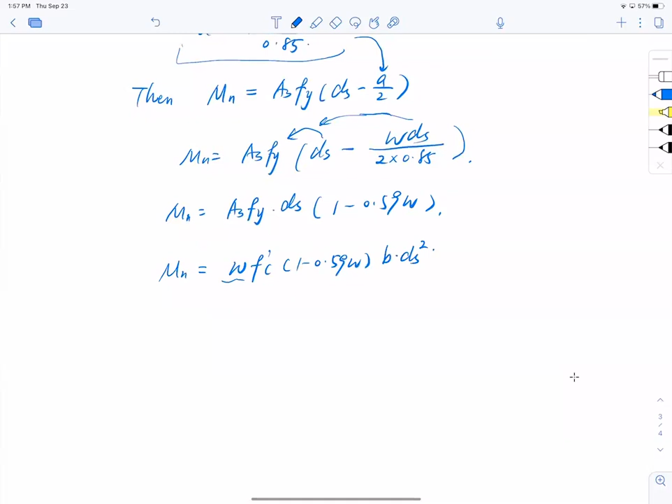Now if I call R, a new terminology, equal to omega F prime c times 1 minus 0.59 omega, this is called the flexure resistance factor. Let's call this equation 8.3.

And finally, folks, my Mn, basically using R, becomes R B ds squared. R B ds squared, and this is equation 8.4.

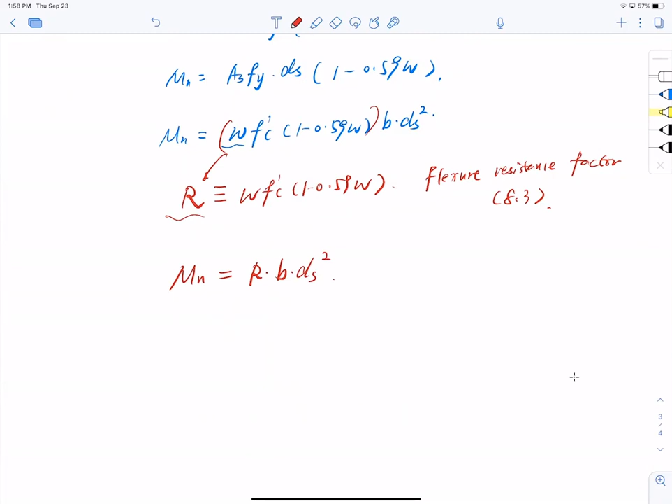Why is this so important? Because, folks, this is Mn. What if phi Mn has to be greater than or equal to Mu? That is, phi R B ds squared has to be greater than or equal to Mu, and then I can have B ds squared.

This is a section property basically, right? A variable related to the section size has to be greater than or equal to Mu divided by phi R.

Why am I so happy? Because, folks, now look at the right hand side: I have the applied moment, I have phi, the strength reduction factor, and I have R, the flexure resistance factor. With all these terms from the right hand side, I can determine the section size.

Alright, folks, we're going to stop here, but I want you to remember this equation in your heart, because it has absolutely important meanings in the design for unknown section size. Remember this. We will talk about how we are going to use this for our next problem.

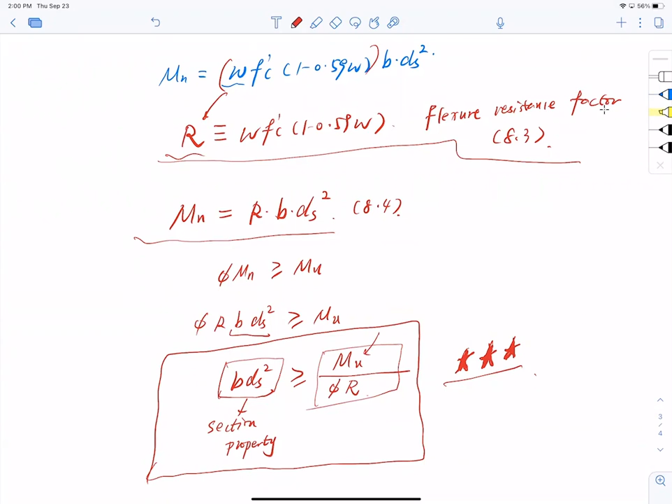Any other questions for me? Yeah, when's the quiz due? That's gonna be my question. Quiz 6 due - I gave you 2, actually 3 days, let's do, well actually 4 days now. Due on Monday, how about that? Sounds good.

Anything else, folks? I just got a question about the homework, but I can wait. Okay sure, Nick, any questions? Will this lecture be posted on your YouTube channel? Yes, all these online lectures, including the next 2, only 5 lectures will be posted on YouTube. I have another question - how long do we have for the exam, and how many questions? I think I said it earlier in the lecture, 4 problems.

Hello, can you hear me? 4 problems. Yeah, I can hear you. Okay, I'm just gonna stop recording.